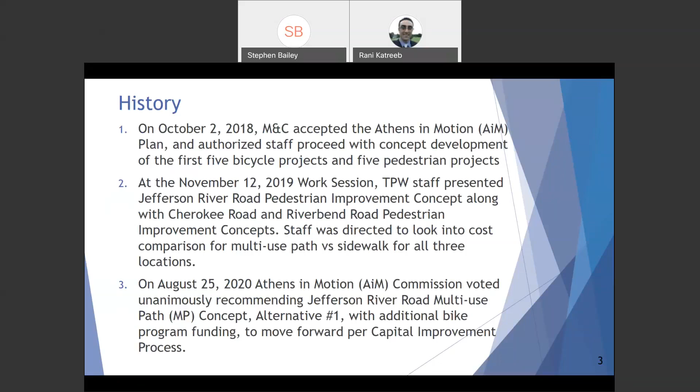One initiative they focused on was to make sure we put each of our potential projects through the lens of our complete streets policy. In the case of sidewalk projects such as this one, that meant doing cost comparisons to determine the feasibility of installing multi-use paths versus sidewalks at these locations. Last month, staff shared alternative concepts with the Athens in Motion Commission, and after comparing costs and benefits, their recommendation is to move forward with a multi-use path concept along Jefferson River Road. We will still be presenting both sidewalk and multi-use alternatives for you here today so that we can get additional feedback from you, the viewing public.

We were excited to see Jefferson River Road go through our newly updated public engagement process, including an initial public forum and an on-site walk audit, which Commissioner Vincent joined us for. Comments at the audit were positive in favor of the sidewalk, but the biggest request we received was for additional consideration for bicycles as well. So we're currently in our next phase of public input, and we ask that you please take time after watching this presentation to fill out the survey link on the last slide. And now I'm going to turn it over to Rani, who will talk you through the specifics of the Jefferson River Road project concepts and explain next steps.

Thank you, Stephen, and thank you, our listening public, for taking the time to tune in to this recorded presentation on the proposed improvements on Jefferson River Road. Athens in Motion context is shown here on this slide. In the project vicinity, we have funded projects including Vincent Drive Sidewalk, funded through SPLOST 2020. Complete street analysis will be performed for a multi-use path comparison. Barber Street Bike Facilities, funded through T-SPLOST 2018, and Chase Street Bike and Pedestrian Facilities, a project that is going through concept and preliminary engineering. This project is funded through a GDOT TAP grant with local matching.

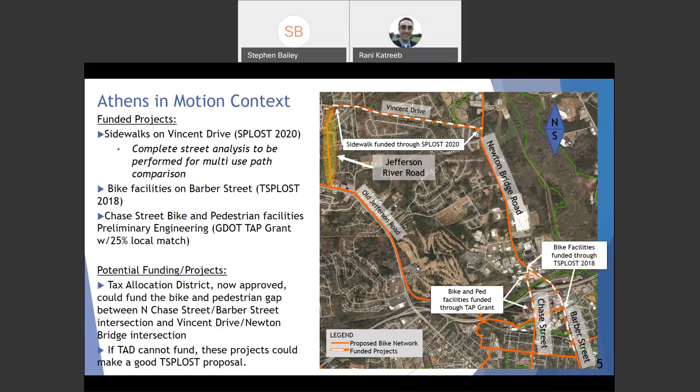Jefferson River Road connectivity project limits extend from Jefferson Road, State Highway 129, shown on the screen, top left image, and end at the intersection of Vincent Drive, shown on the screen, bottom right image. Currently, pedestrians do not have a safe crossing from the existing sidewalk on Jefferson Road to the existing sidewalk on Old Jefferson Road and Jefferson River Road. Providing connectivity in this location is included in all concepts. A couple images of the Jefferson River Road corridor are shown, including one of the 4 bus stops within the project limits that are to be connected. On the next slide,

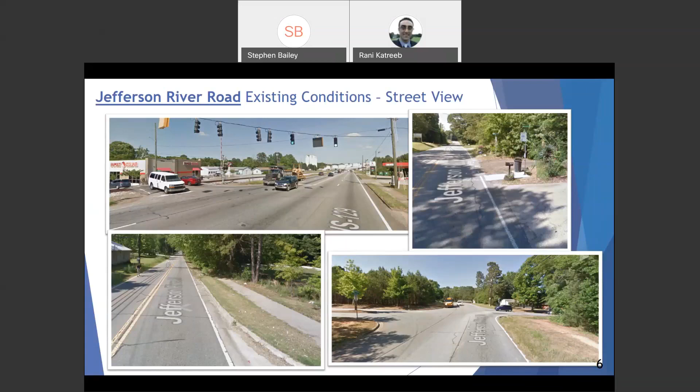here we show the Jefferson River Road sidewalk option. The sidewalk option extends a total of 4,300 feet of sidewalk network. It starts from the existing sidewalk network on Jefferson Road, crossing GDOT right-of-way, railroad tracks, and Old Jefferson Road, and connects with the existing Family Dollar sidewalk with a series of ramps, crosswalks, and signal improvements.

The proposed 5-foot sidewalks begin from existing Family Dollar's sidewalk to Vincent Drive, connecting existing 4 bus stops on the east side of the roadway. Accessibility improvements are proposed at all 4 corners of Vincent Drive intersection, with ramps and crosswalks.

Controlled crosswalks including rectangular rapid flashing beacons, with crosswalks, are to be considered on Vincent Drive, Alice Walker Drive, and Ambler Road, pending warrant studies by the department during preliminary design phase following concept approval. 3 different sidewalk alternatives have been studied, with cost estimates ranging between $1.1 to $1.8 million.

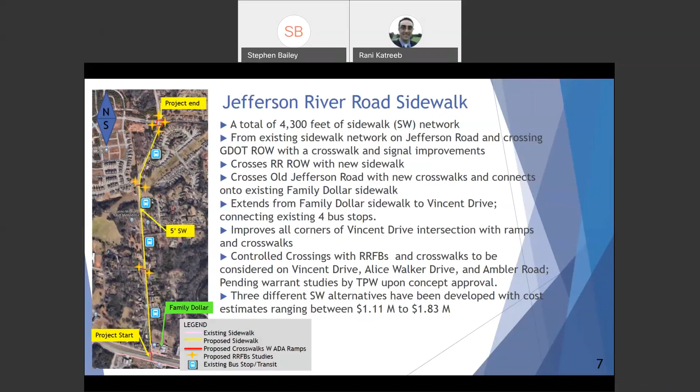On the next slide, we see the first sidewalk alternative. This is a 5-foot sidewalk over existing grade with a cost estimate a little over $1.1 million. Advantages include low cost, less invasive than other options, minimal earthwork, and less tree impact. Disadvantages: no improvement to existing drainage facilities, minimal improvement to driveway, and does not accommodate bicycle traffic.

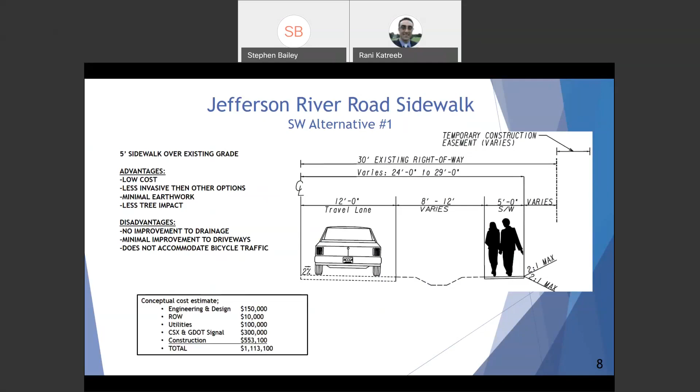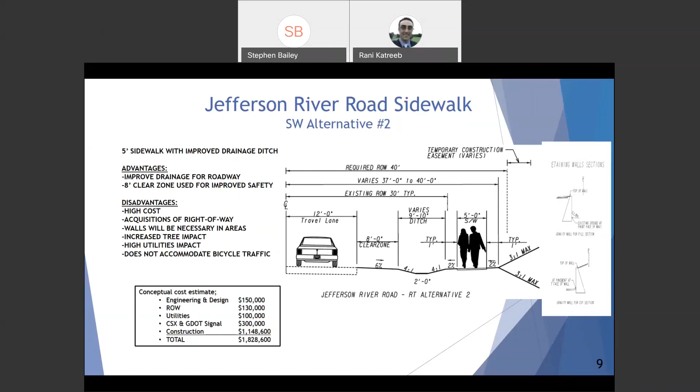On the next slide, we present the second sidewalk alternative that includes a 5-foot sidewalk with improved drainage ditch between sidewalk and travel lane, with a cost estimate a little over $1.8 million. Advantages include improved drainage for roadway and 8-foot clear zone used for improved safety. Disadvantages include acquisition of right-of-way, walls will be necessary in areas, increased tree impact, high utility impact, and does not accommodate bicycle traffic. On the next slide, we present the third sidewalk alternative.

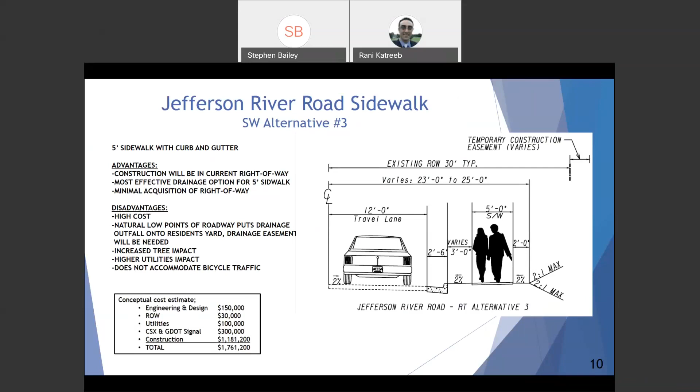This is a 5-foot sidewalk with curb and gutter and a cost of $1.76 million. Advantages include construction will be in the current right-of-way, most effective drainage option for a 5-foot sidewalk, and minimal acquisition of right-of-way and easements. Disadvantages include high cost for 5-foot sidewalk, drainage easement will be needed, increased tree impact, high utility impact, and does not accommodate bicycle traffic. Next slide.

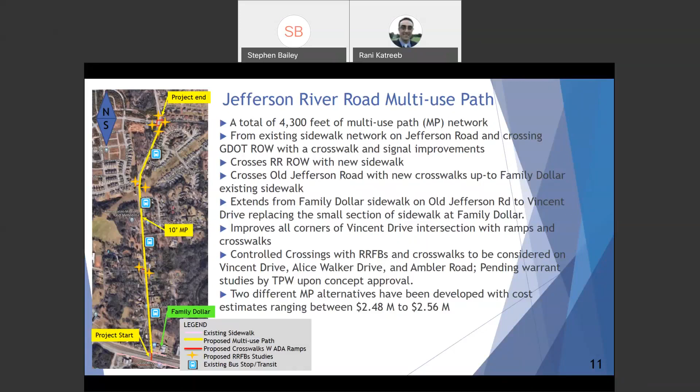On the next slide, we show the first multi-use path alternative. This is a 10-foot multi-use path with curb and gutter within a 17-foot 6-inch urban shoulder and a cost estimate of $2.48 million. This is the recommended alternative by Athens in Motion Commission. Advantages: most effective drainage option for a 10-foot multi-use path, more space for pedestrians and bicyclists, and less costly option for a 10-foot multi-use path when compared with the second multi-use path alternative. Disadvantages: drainage easements will be needed, walls will be needed in areas, increased tree impact, and higher utility impact.

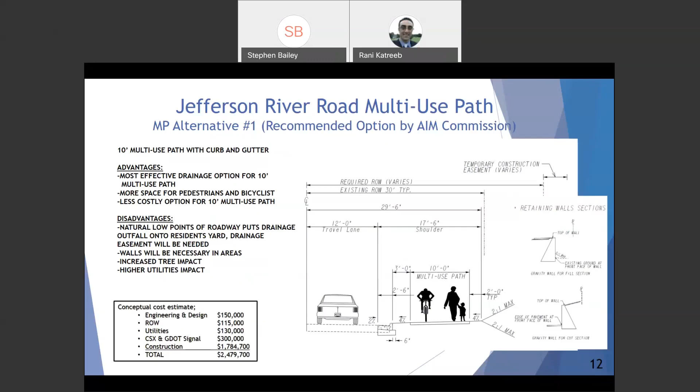On the next slide, we present the second multi-use path alternative. This is a 10-foot multi-use path with improved drainage ditch and a cost estimate of $2.56 million. Advantages: improved drainage for roadway and accommodates bicycle traffic. Disadvantages: acquisition of right-of-way, walls will be necessary in areas, increased tree impact, high utility impact, some property may be condemned, and more costly option for a 10-foot multi-use path.

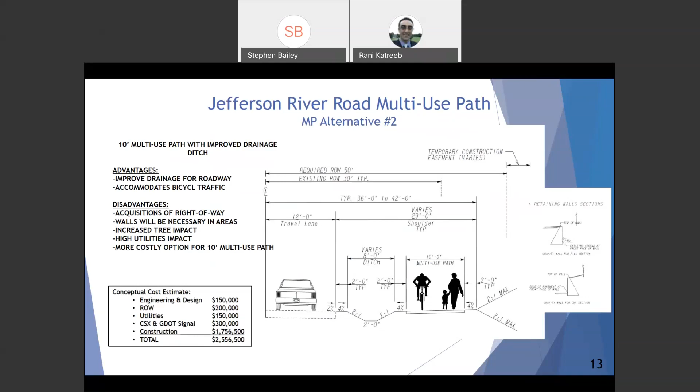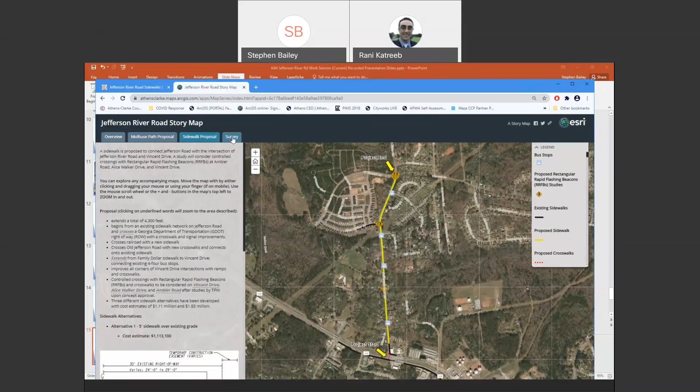So this landing page will have ways for you to sign up for notifications. It'll also have a survey available, as well as this recorded work session and the recorded Mayor and Commission work session from previous months. I also want to show you, there will be a link to this GIS story map that further explains the alternative concepts, compares costs between a multi-use path and a sidewalk path, and then also shows you one more link back to the survey where you can voice your feedback.